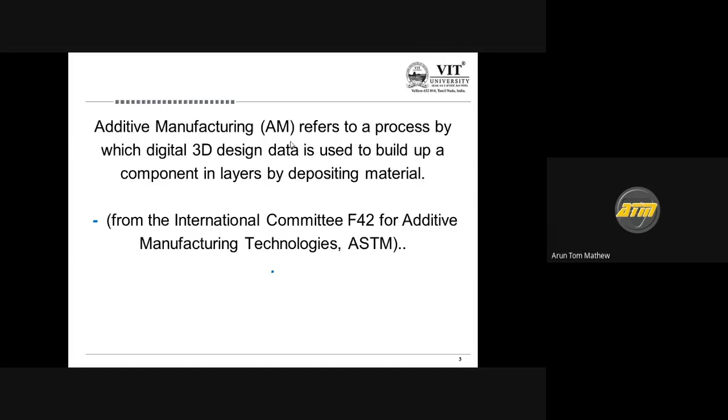But came in additive manufacturing, where without losing any material, or literally very little material we are going to lose, we ended up making products faster and with a better finish. So that brought in a very big change in the kind of technology product designers and people who are into new products are developing.

So first we need to understand what is basically a 3D printer. I'm sure all of you are aware of the normal printer, the 2D printer, where we used to print black and white A4 sheets and A3 sheets, both color and black and white. But nowadays we have the so-called 3D printers, which added the Z dimension to it. So we don't have to print anymore in 2D. We can actually get almost to-scale 3D printed objects where you can feel the products in your hand.

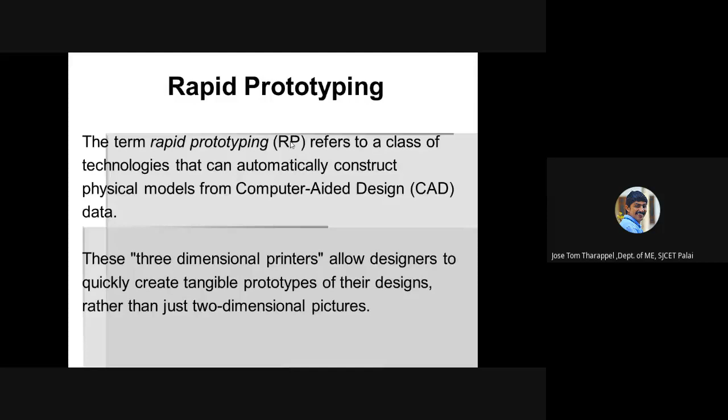Getting into more specifics, it's basically helping designers and more specifically prototype engineers to understand their design in a better way rather than just looking at a 2D picture. This has changed everything, because 3D printing is just an offshoot of something called rapid manufacturing or rapid prototyping. And when you say rapid, it's basically fast. I'm sure all of you are aware that nowadays you are able to print a product within an hour's time.

The cost of printing has come down so much that you are actually able to buy a 3D printer almost equivalent to the cost of a normal 2D printer. In fact, some of my students here have bought a printer and kept it in their rooms because they don't want to depend on the printer available in the lab, since it has become so cheap. Four or five students pool some money and they're able to buy a printer on their own.

All it requires is a software, a CAD software. You just have to plug and play, and then you are able to print at a very fast pace. So this has changed a lot of things over the years, and there's been a lot of advancement in it.

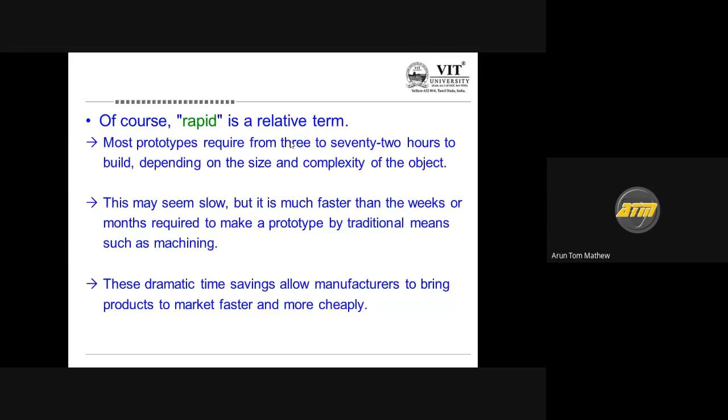Because the moment you have a 3D model, it becomes very good for actually communicating your ideas. It becomes an excellent visual aid. At the same time, it can also be used for testing. You don't actually require metal prototypes anymore. You can use 3D printed prototypes to test and study your product in a better manner. It also helps you create tooling in a faster manner, without spending a lot of time depending on a third party to make your tools. And with the advancement of this technology, you're actually able to make production grade quality material, which has been accepted by the industry. That's the reason why there's so much focus in this particular area.

So just a quick recap of what 3D printing technique is all about. I'm sure most of you are aware, but just to get a feel of the whole concept, we'll run through this.

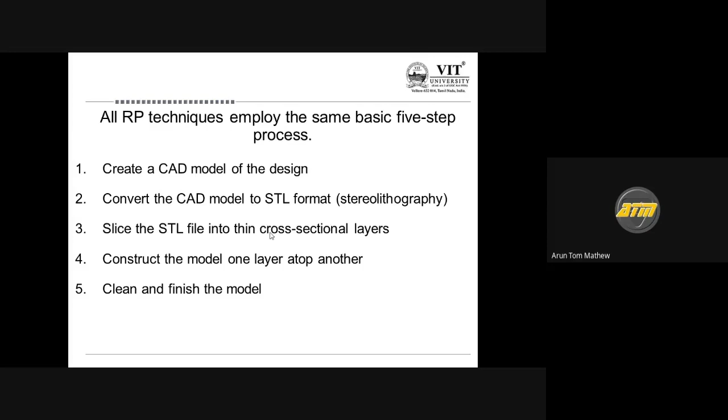First and foremost, you require a CAD model. From the CAD model, we develop something called the STL format, which is basically the input for the 3D printer. In the software itself, the STL format is basically the whole product or model sliced into a number of layers depending on the accuracy you want. Then the whole thing is sent to the 3D printer. The 3D printer understands the stereolithographic format, and based on the lowest slice layer, it starts printing one layer over the other, and finally, over a period of time, finishes the complete product. Then all you have to do is take it up, clean it up, and start using it right away.

So that's what happens nowadays with a lot of advancement. You can have numerous softwares which are compatible with 3D printing. All you require is a decent 3D model software, CAD model software, which can give you a solid model with a better finish. Once you're able to do it, you can directly get into a 3D printer.

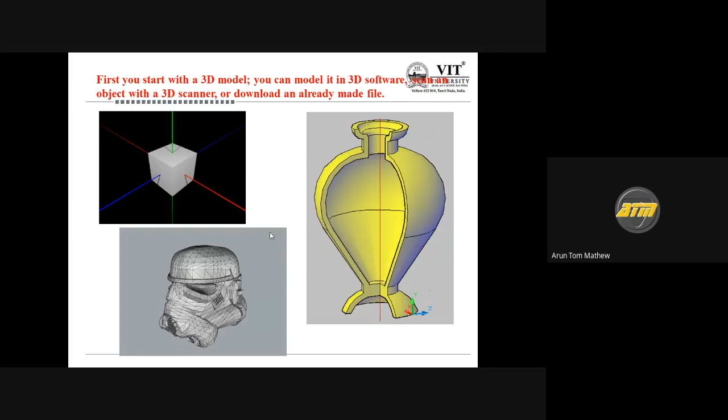Also, with the development taking place, we don't have to create a solid model anymore. We can get a model from a third-party scanner, now called a 3D scanner, which has also become very cheap. You can use a 3D scanner to simply scan the product of your liking, get all the scanned data, and directly take it into your 3D printer. It becomes much easier. So even a person who doesn't know CAD isn't worried now, because the system takes care of converting a physical model into a CAD model based on your 3D scanner. You can directly import this scanned model into the 3D printer, and then directly print.

So this has been a hit. You don't have to be technically strong to understand 3D printing. Once you have the requisite software and hardware, you can simply go ahead and start printing. So likewise, it all depends.

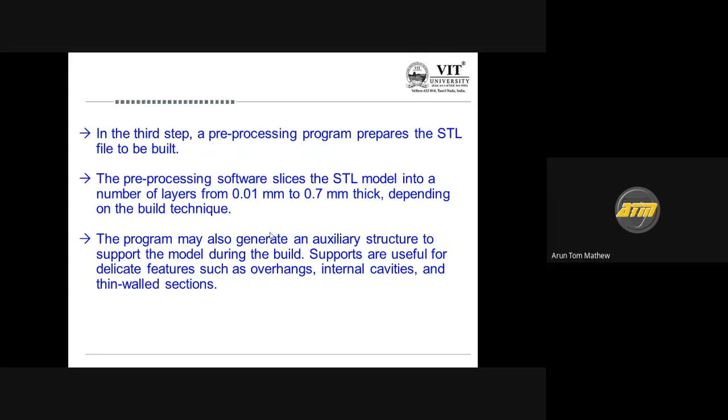Once you understand the nitty-gritties of the technology, you will understand that given the complexity, you have to do some pre-processing to understand how good your layer thickness should be, so that you get a better finish compared to the standard, default thicknesses adopted by some software. So once you understand the nitty-gritties of the model you want to print, whether it has internal cavities or thin wall sections, depending on the complexity of your component, you can start using the right parameters.

And you will get a better finished product at the end of the day using the 3D printing machine. So with this, depending on what product it is, doesn't matter how complex or what kind of material you want to use, you are able to print, which wasn't practically possible even before this technology came into existence.

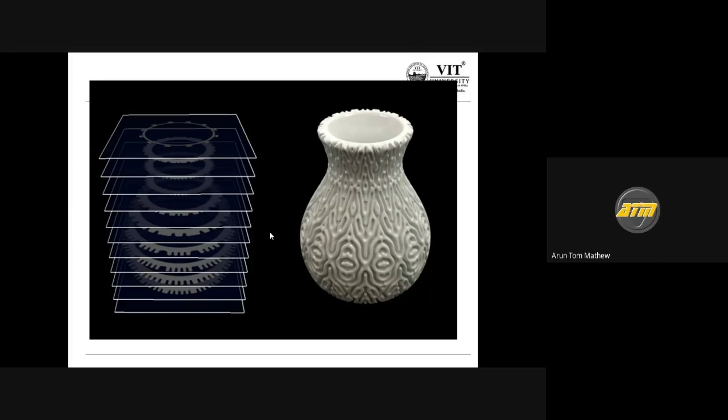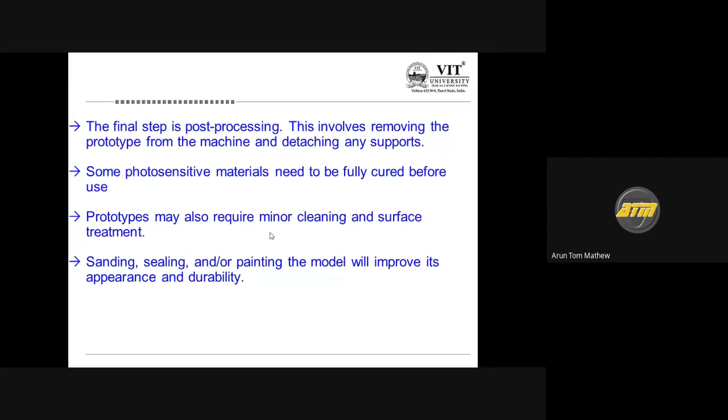So you need to understand the kind of material that has been used. Earlier, there were initial materials such as nylon and PLA and all these things. But nowadays we have a lot of advancement, such that people have even started printing metal using 3D printers.

Of course, this is a little bit expensive, but over a period of time, I'm sure the cost of metal 3D printing will come down and this will become commercialized. You're probably aware that Wipro and IISc Bangalore just last year commercialized one metal 3D printer in their campus, where industry is also collaborating, so that you are able to make production grade products directly printed out of a 3D printer.

So no more do you have to depend on the conventional style of machining or material removal. Irrespective of the complex models you have, like a turbine blade, you can directly print using a metal 3D printer, and you're able to achieve it in no time. The beauty over here is...

you can actually commercialize, I mean, whatever may be the complexity, you can custom print the product you want. There's no need for the customer to order 10,000 samples or 1,000 samples before I'll make the product, because normally I'd need to invest in tooling. In this case, I don't require anything. Whatever the customization, I just require a 3D model, and then I will go ahead and print the model and get it to you.

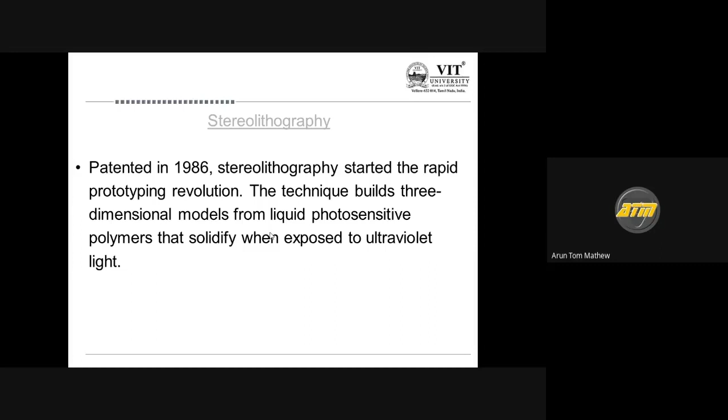Depending on the complexity, the time required will vary. So the whole thing started off when the process of stereolithography was patented in 1986. Mind you, I would like to emphasize the term patented. Only when you patent or publish such kind of work will the general public understand there's some work happening here, and people will start appreciating what has been happening.

So what happened was, some material was given, and you were able to print like what you're able to see on your screen, and people were in awe of it, wondering how we are able to create such complex shapes in less amount of time.

So where did it all come from? It's not something very new. This was there almost in the 1800s. If you look at the Greeks, that was there too. They used something like this to build monuments, which are still existing in the world, and they actually did this by building blocks over each other. So the same concept was actually used.

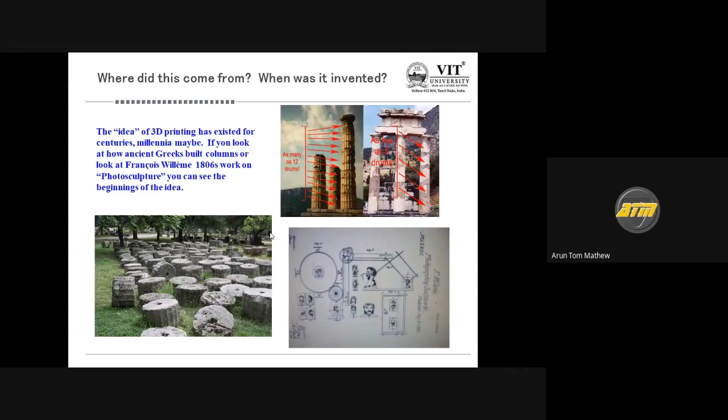What we see now in the present 3D printer is we are actually doing it layer by layer, just that the thickness of the layer is different. So the hero of this whole story is Charles Hull of 3D Systems, who gets the credit for first developing the 3D printer in 1984. And he was the one who coined the whole technology called stereolithography.

And the word is so famous that the STL format is, in other words, called the stereolithographic format. But I'm sure you're aware that STL actually stands for Standard Tessellation Language. It's like how a photocopier is called Xerox - I'm going to take a Xerox, but in actuality, you're just doing a photocopy.

The machine, the product from Xerox company, made it so famous that we started using it in our day-to-day life, and that's what happened over here. Very similar, it's a revolution over here, that the term, the file which was supposed to be called Standard Tessellation Language File, STL, invariably ended up being called a stereolithographic file.

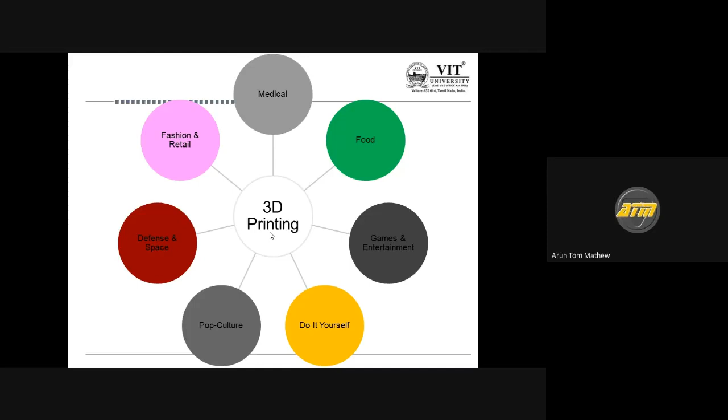Likewise, this technology has also found a lot of applications in the defense sector and even space, where nowadays existing generation aircrafts no longer have spare parts. If you need to replace a spare part which is no longer available, you can actually use this technology to print that custom-made product part and then fix it back into your aircraft.

Even nowadays, people are talking about 3D printing directly in space. In fact, they are even looking at projects to print 3D printed material on Mars. With the latest travel to Mars, people are trying to see whether you can actually print directly on Mars and make houses there, because it is definitely extremely difficult.

If you want to make a house there for scientists to stay, it is practically impossible to build a complete house on Earth and then transport it to Mars and assemble it there. Rather, it would be more cheap and economical if you could actually directly print on the planet Mars. We never know how the future is going to turn, but it will be very interesting to see how this technology is going to help.

Likewise, look at more applications. This is definitely used by a lot of industrial designers, who are known to make excellent and beautiful products. To understand the products better, they like to have a physical model, and instead of doing a clay model or a thermocol model or a model with some sort of POP material, they can actually directly 3D print the model. Of course, it can be slightly expensive in the initial stages, but you will get an actual feel.

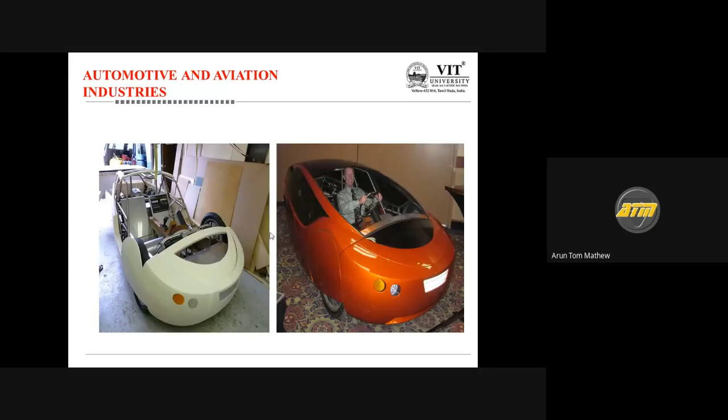You can see one of the cars over here, which is totally 3D printed - the outer shell is totally 3D printed, and you're able to actually commercialize this product which is 3D printed. In fact, this application is also there in architecture.

Even civil engineers use this extensively. Nowadays, I'm sure you've heard of houses getting 3D printed using concrete as the raw material, and they're able to build a full-fledged house by simply printing concrete layer by layer, which forms the wall of the house. This has also been used in architecture, and they're able to handle complexities, especially in a lot of monuments coming up in different places.

No matter how complex it is, you are able to print these models. And I'm sure you would have seen the different kinds of chocolates that are available in the market.

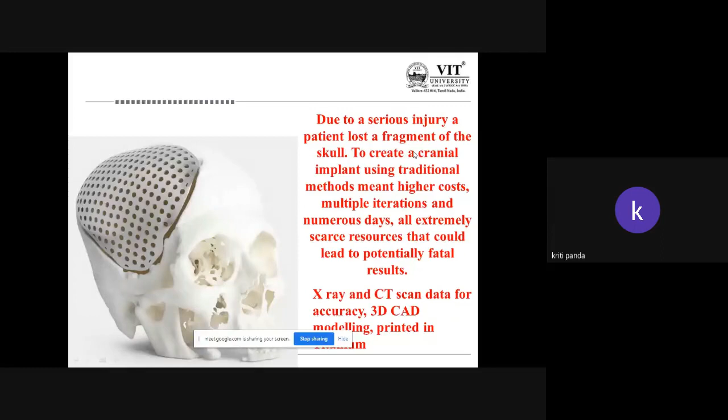Okay, I'm sorry, I didn't know that I left the meeting because once you put a full screen over here, I can only look at a plain screen. Praveen, can you hear me? Yes, sir. Okay, thank you. I don't know how much I've missed.

So they made up this particular plate, which is custom built for this particular patient. They did a small surgery and inserted this plate onto the skull and then grafted back the skin. Over time, it looked normal, and a third person looking at this lady will never know there's a metal made of titanium, printed in titanium, fixed onto her head. Anyone looking at her for the first time will never know she had an accident. So that is the kind of advancement 3D printing has.

You are able to print using a material called titanium itself, and this is possible when you play around with the CT scan data from the CT machine, and then using the CT scan data, you are able to make a CAD model of the requisite portion, and then custom print this to fit your skull.

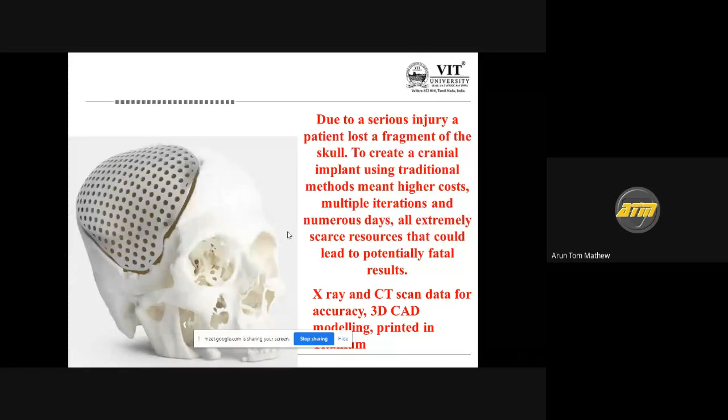And likewise, even in dentistry, where you need to replace the complete jaw, this technology can be used extensively, and it helps people go back to their routine life without any stigma. Like I said earlier, this is another patient, again a real-time case study.

Hello sir, the audio is not available. Yeah, I think I'm back. I'm sorry, I think there are some connection issues. Yeah, am I better? Can you hear me? Yes sir. Can you see my screen? Yes, it is audible, thank you. You can continue, thank you.

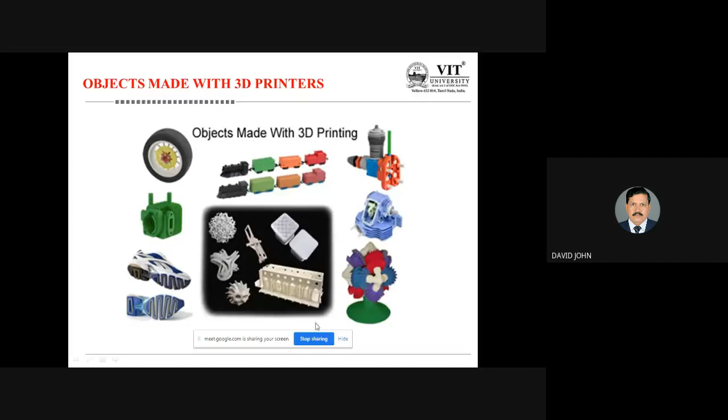So what is happening now is we have seen this application, and there's a lot of toys getting printed now, and it's definitely helpful for kids who can have custom toys. And another area where this is getting extensively used is replacement.

Especially when a lot of products are going offline, off shelf, and you don't have a replacement, you can actually do a custom build replacement for your kind of products. Likewise, whatever may be the shape of the product, you are able to print whatever the complexity, whatever color you want, as long as you're able to get the material and the color grade you want, you are able to print the particular product.

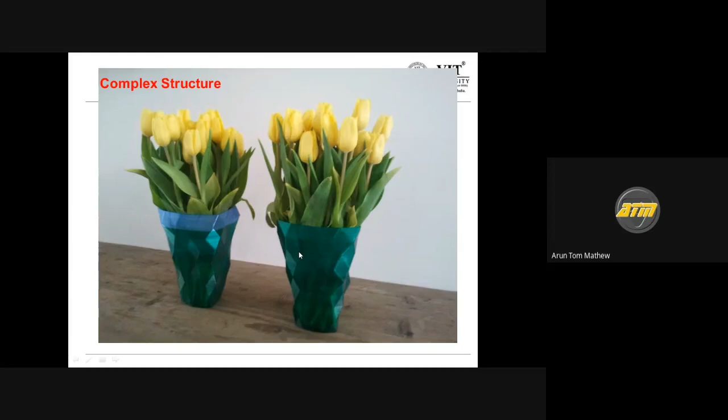You'll also be surprised to know that the Airbus 350 has seen a lot of advancement, using a lot of composite materials, and even these composite materials have been 3D printed. In fact, the latest version of Airbus, and even Boeing, has a lot of 3D printed products in their aircraft. Next time you fly, try to look out whether you can identify a 3D printed product in your cabin, because it will be very difficult to distinguish the two structures.

Let's go ahead. We have some animated characters also which can be 3D printed. And we have another important application where we have prosthetics.

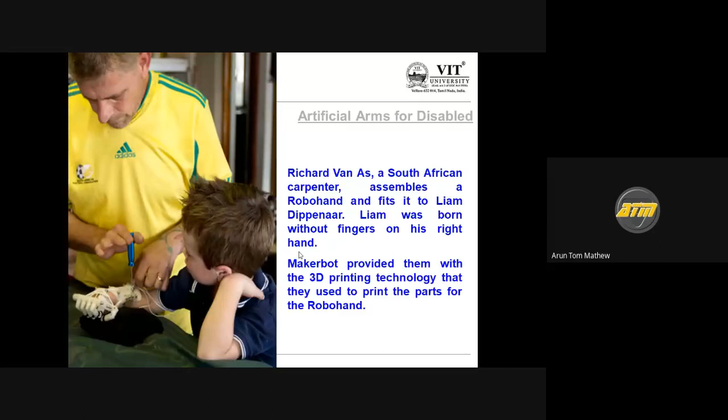Where people are able to replace amputated hands and legs with this particular technology. I just want to play a small video. I hope it will be beneficial.

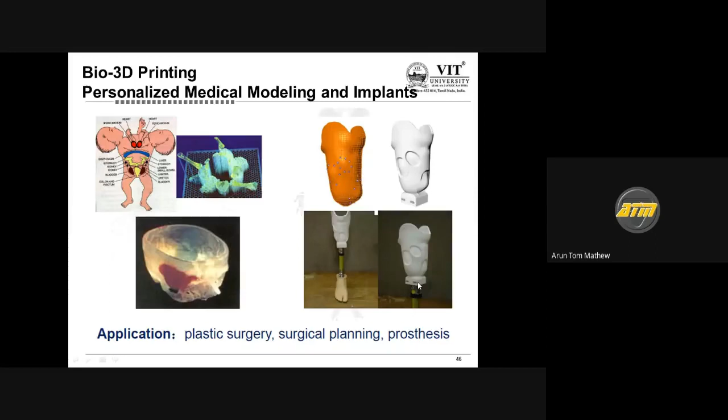So, yeah, so like I said...

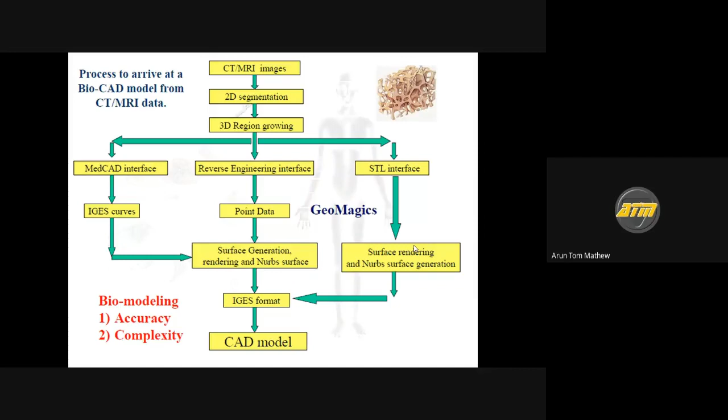And then what happens over here is we have an algorithm where we require the CT or MRI images, and we do a 2D, 3D segmentation, and then generate point cloud data out of it. Using all these softwares, we have to do some biomodeling which requires a lot of accuracy. There is more complexity over here because, since it's a human body, you have to be very careful, it's extremely complex, and you require a high level of accuracy to achieve something like this. You can see there are experiments where you're able to actually print a total tissue, in fact a liver or a heart is getting printed over here. But of course this is all very much in the nascent stages, it will take a lot of time to get commercialized into the market.

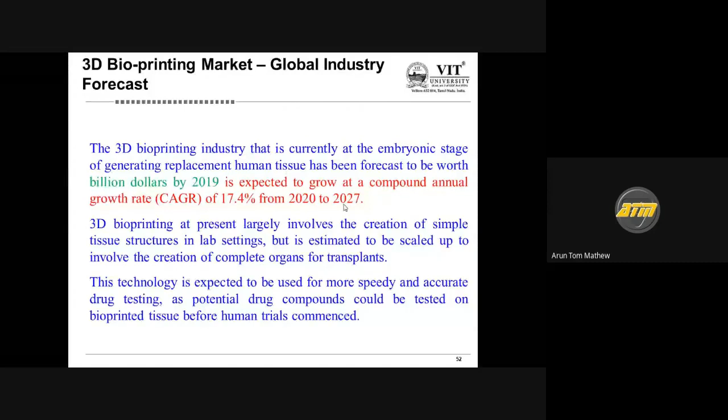Especially in this current pandemic situation, COVID-19, there is more demand over here, because you find issues where lungs are getting damaged, and people are looking at exponential growth in this area. I'm sure by this time you're aware that people in different education institutions and industries were overnight printing masks and distributing to police personnel and medical people, so that they have a shield in front of their face, which is 3D printed. They could do this at a very fast pace because of the technology available, and because the printer is actually very cheap.

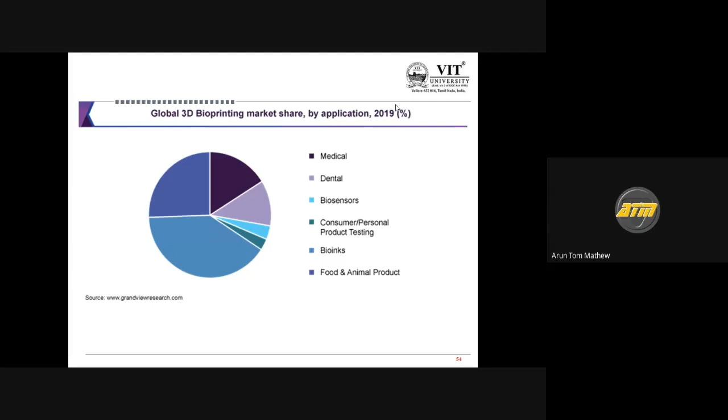So you can also see the applications over here, a lot of applications in terms of medical, dental, people are also able to develop some kind of biosensors using this technology. People are developing something called bioinks, which I will come to shortly. Also people are exploring whether we can print food, and even meat, using this technology. If you look at the market value, it's a huge number, even people can't imagine how this technology is going to generate this kind of revenue over the years.

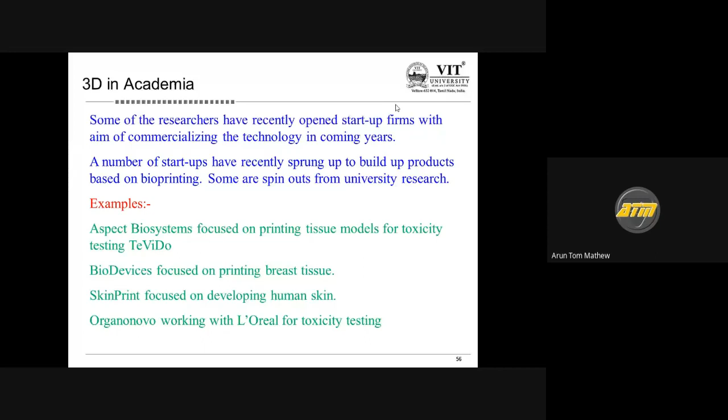Yes, so even in academia, a lot of universities are trying to do a lot of niche research, and they're incubating it in their own universities. I can give you examples where some companies are able to start commercializing their own research, and they're able to make a lot of products from it. If you look at the commercial market itself, a lot of work has been going into developing bio ink and bio paper, because these are the prime materials for you to print.

Without the materials, you definitely cannot print, so you have a lot of scope in making biocompatible materials themselves. To deal with such materials, you need requisite software, because all these materials are non-linear, so you have to do some kind of analysis, even design, to understand how they will react in real time. And definitely you have to have the requisite hardware. I'm sure a lot of industries are doing work to commercialize each of these sectors.

This has also created a revolution in the pharma industry. I've read that nowadays you can actually 3D print your own medicine, depending on the Industry 4.0 revolution where everything is monitored. You can monitor a patient, and let's say, for layman discussion, you have fever and need to consume 650 mg of paracetamol. If you go to the doctor, he'll say take 650 mg paracetamol for the next 5 days. But over time, within 3 days your temperature is actually going to dip. So why do you have to consume 650 mg paracetamol? Instead, if you have a sensor embedded that can monitor your level of infection in your body, and instead of a fixed 650 mg dose, you could 3D print the paracetamol so you just consume the required level.

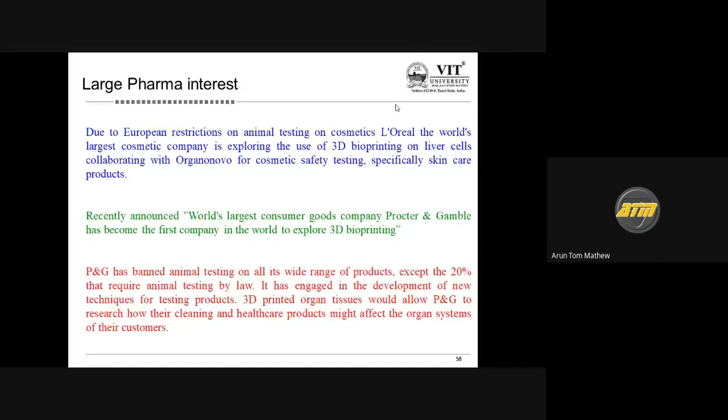So there's a lot of revenue being generated here, but with so much interest, you definitely have to look at the flip side. There are a lot of challenges, because the first challenge is that when you insert a foreign body into a biological structure, it will definitely tend to react. So you have to be very careful about what kind of transformation or transplant you're going to do, because this is something every doctor and every patient will experience, since the moment a third party enters your human body, your body will definitely react.

So you need to visualize this even before inserting it into the body, and understand the physical, chemical, and biological impact these products can have on the human body. Likewise, it calls for fabricating complex tissues so they can emulate what is there in your human body. These are the challenges, and this has been widely used in the industry, like what you can see on your screen.

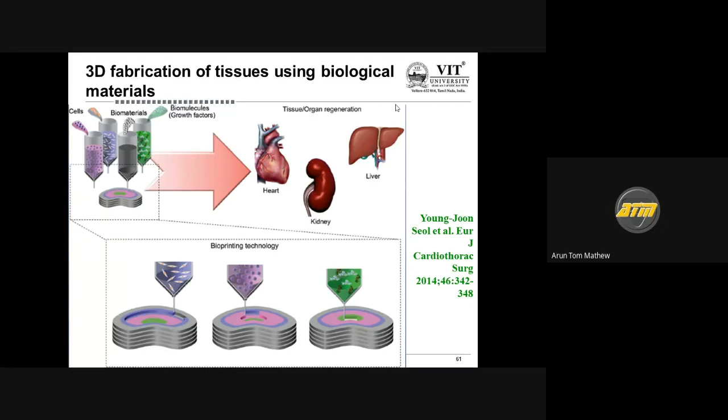A lot of advancement has been made. I'm quoting a paper from way back in 2014, where they are trying to 3D print tissues using biological material. Also from this 2014 paper, they were able to print a trachea, which is basically hollow, and they also succeeded in printing livers and tongue. Of course, I won't say this is directly available now, commercialized, but a lot of work has happened here.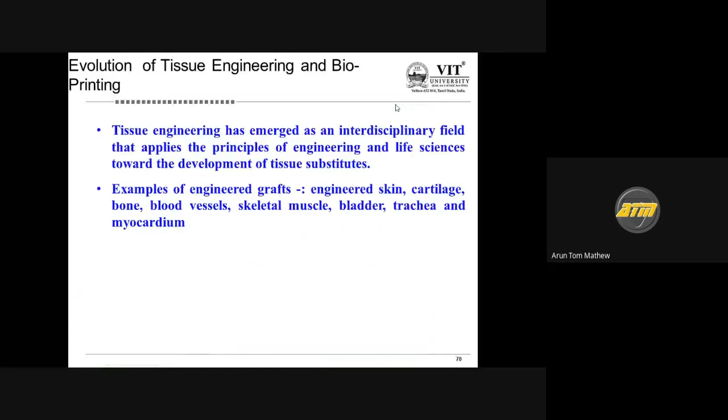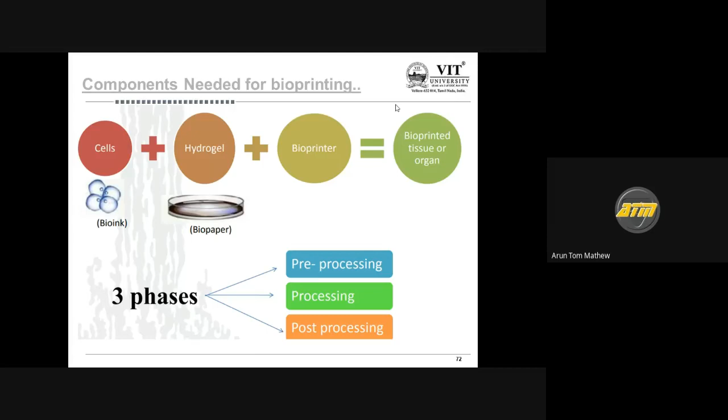I'm trying to skip some portions because there's a lot in there. What is required here is you need to understand the printing process, because you have to have some kind of material called bio-ink. What does this bio-ink consist of? It's basically your cells, and this cell you have to mix with something called hydrogel, and this slide will explain it better.

I'm sure you've heard of stem cells, and these stem cells have to be cultured so they grow in a laboratory environment. Once they are cultured, you have to collate them with a hydrogel, and this will form something called bio-ink. This is what you use to print your tissues in a controlled environment. So this becomes even more complex, and this is what has been used for bioprinting.

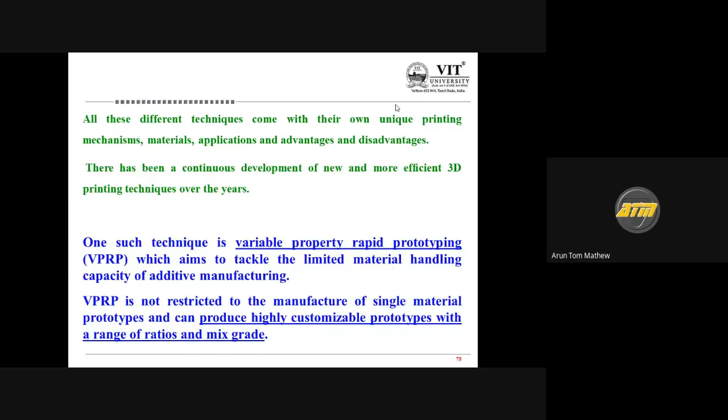So we also have to be aware that printing is not restricted to one kind of material. Especially when you have composites, we definitely have to look at customizing prototypes by mixing different kinds of materials, in different ratios, and even mixing different grades of materials. That's where we have the beauty of 3D printing advancing with the use of something called smart materials.

With this advancement, we are able to print materials which are smart enough, and that's where we have something called 4D printing. This is a beautiful technology that is evolving.

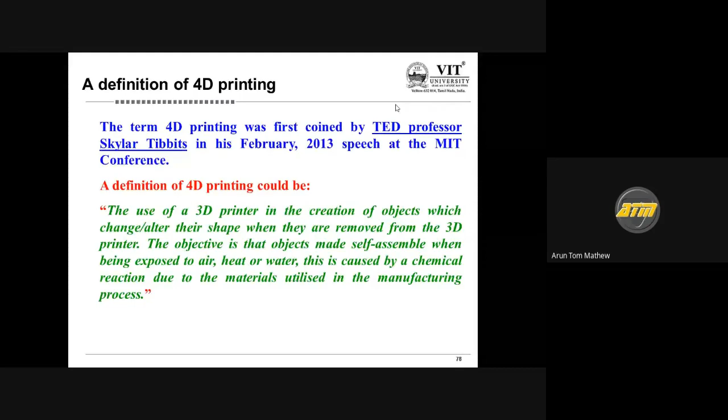A lot of work has been happening in this area. Interestingly, the term 4D printing was coined by an MIT professor, Skylar Tibbits, who defined it as the use of a 3D printer in the creation of objects which change or alter shape when removed from the printer. The objective is that these objects self-assemble when exposed to air, heat, or water. This is caused by a chemical reaction due to the materials utilized in the manufacturing process.

So this is what he has defined as the 4D printing process. What has happened is, instead of using your typical nylon or PLA or plastic, we tend to use material which can transform and be pre-programmed to react to a particular stimuli. In a regular 3D printer, you simply insert the material and it gives you a static structure.

Whereas in 4D printing, you use something called a smart material. It can be in the form of a resin or similar, and you print this material which can behave differently when a stimulus is applied to it. I will show you a video so that it helps you understand better.

I'll just play this, I hope it will help.

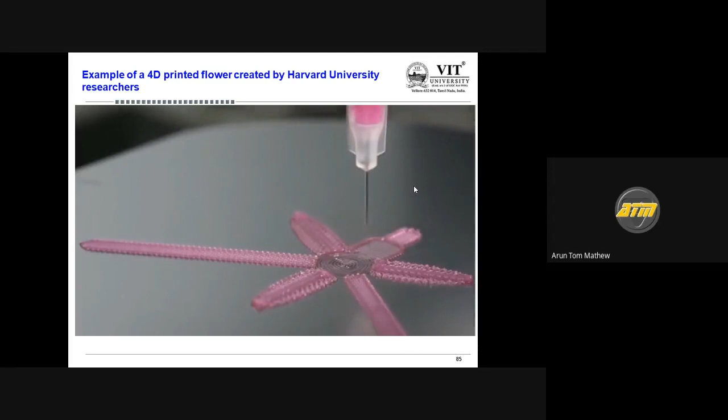You can see here, once that printed object is put into water, it starts behaving like a flower. That is the kind of advancement that has happened, and that's what makes it more interesting, because the whole thing gets activated the moment you put it into a different medium.

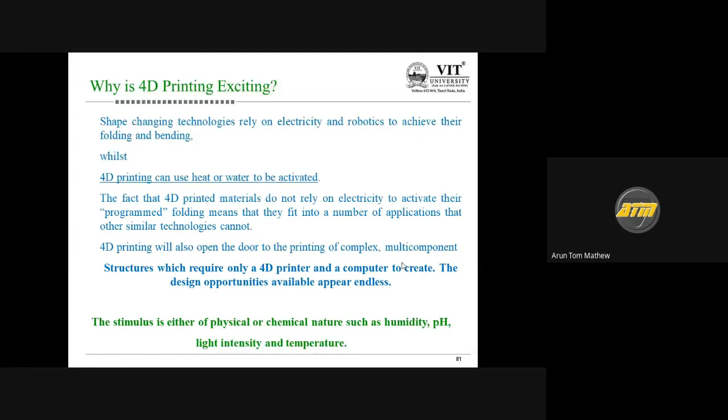When you say medium, you're basically looking at a stimulus, either physical or chemical. Either you put it in hot water, change the composition of air, apply some humidity, change the pH value, the light intensity, or the temperature. Any of these, and you'll find the shape getting changed, which can lead to a lot of applications.

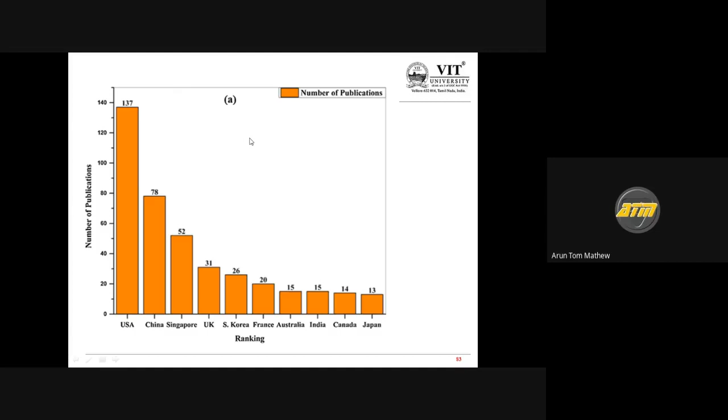So the interesting part is the kind of applications coming out. We in India are far behind — only now have very few people started working in this area. But if you look at the States, they've done a lot of work, and over the years the number of publications has been drastically increasing.

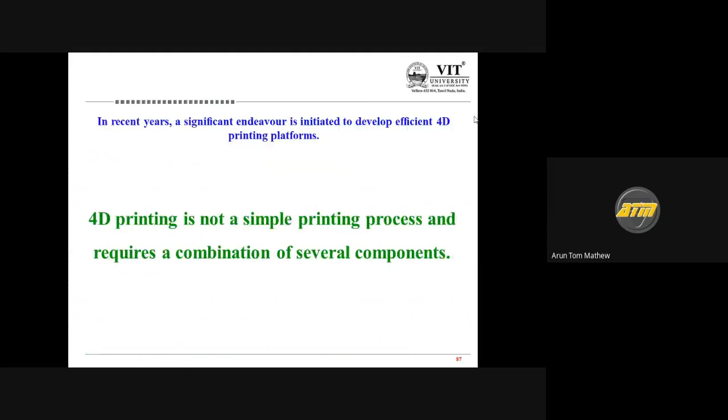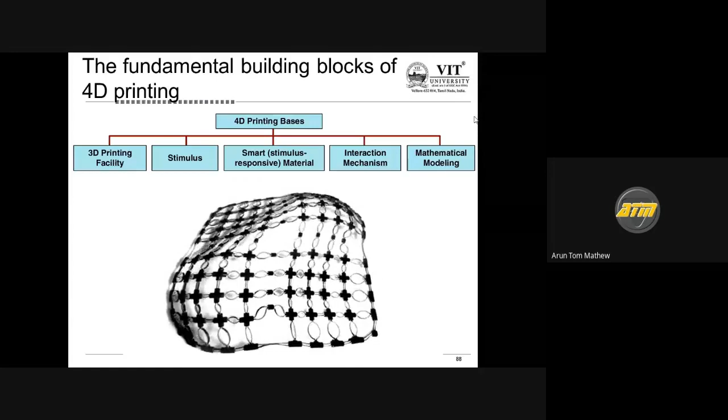To get into the fundamentals, the building blocks of 4D printing are: you definitely require a 3D printing facility, and you need the kind of stimulus you want to use to stimulate your 3D printed component. Then the material you're going to use, which I already mentioned, has to be a smart material, and you need to understand what interaction happens. You also have to look at the mathematical modeling, because you need to understand the physics of how these shapes are happening.

If you look at the 4D printing software, a lot of work has to happen in understanding the modeling. We also have to look at the simulation aspect. There's also a lot of work happening in print management, because you need to print accurately. At the same time, you have to know what hardware and software you're going to use, what slicing mechanism you're going to use, and you also have to look at the feedback mechanism to monitor the whole technology.

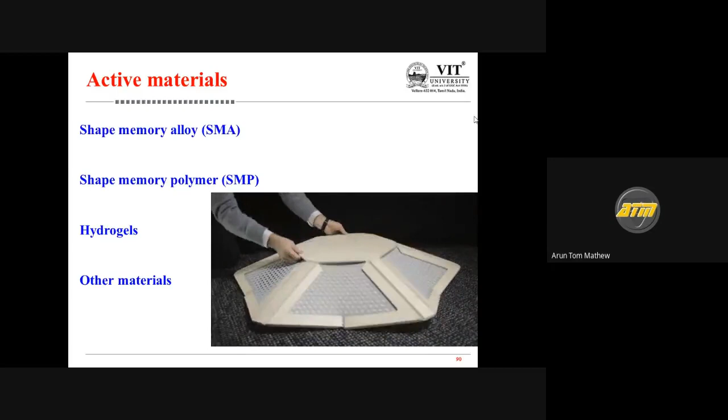You should also have an idea of the different kinds of materials used, especially in 4D printing. Primarily we have shape memory alloys and shape memory polymers. We also have hydrogels, which you've seen used in bio 3D printing. And then we also have a lot of composite materials used in this field.

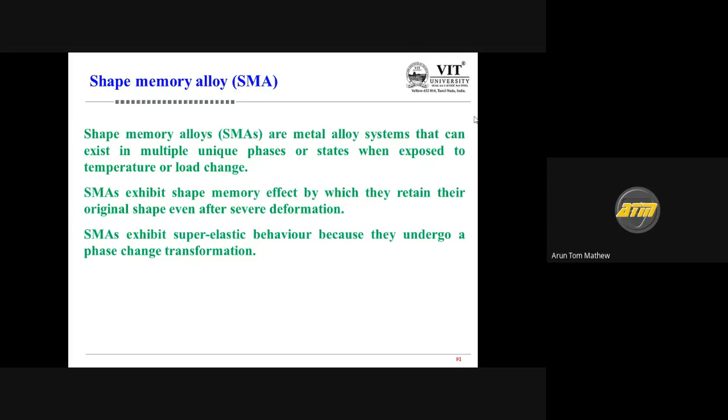A shape memory alloy tends to change its shape when exposed to temperature or some kind of load. These alloys exhibit something called superelastic behavior because they undergo a phase change transformation when exposed to a stimulus. I won't get into a lot of details here, but let's look at one application where this alloy is actuated by magnetic fields and used as an actuator. I will play a video here.

You can see this particular shape memory alloy, which has been used as an actuator.

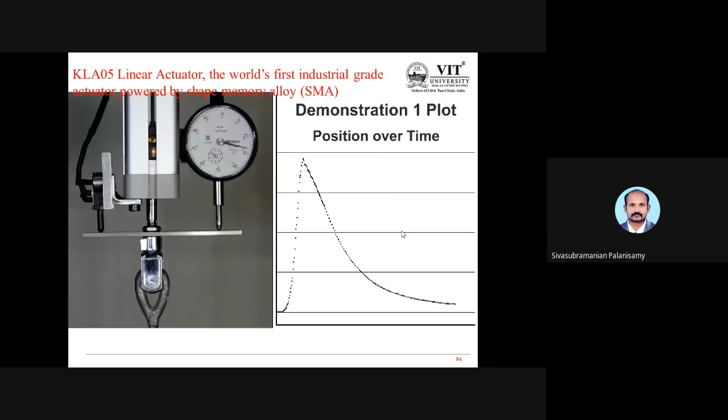Sir, it's not audible. Oh, one minute. What's happening? It's fine, yeah. Is it audible now? Yes, sir. But are you just showing the video, or explaining along with the videos? No, I'm not explaining - the video itself has audio, so I'm not sure whether you're able to hear that. Then it's okay, sir. We thought we were not audible, that's why. Okay, carry on, sir. Thank you.

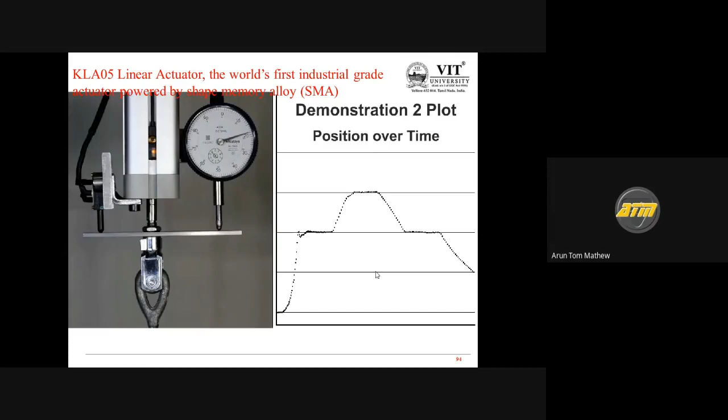You can see this is a linear actuator using industry grade shape memory alloy for actuation. This has a lot of applications in industry, specifically for the actuation part.

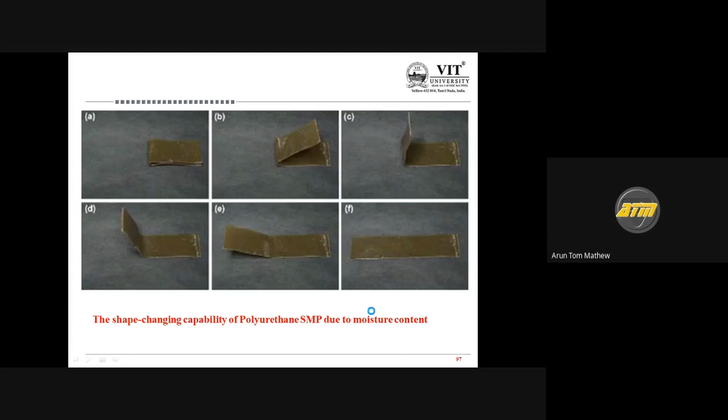Likewise, I don't know whether you've heard of this particular alloy, nitinol, which has become a major player in the biomedical field. You can see the application of the polymer here. Again, I would like to play a video so it's much easier to understand.

You can see how the filament has changed shape when exposed to hot water, and you see how this can be used.

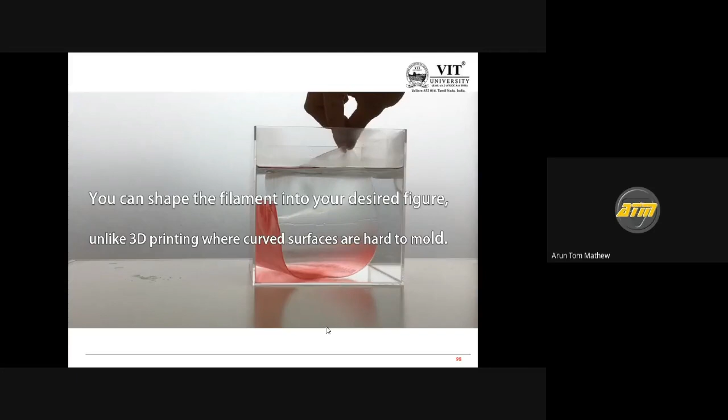Okay, I think it's not buffering well. One more thing I will show you and then go to the next one.

What you can see here is basically a self-folding structure, something like an origami box or a pyramid, as you saw in the video - a material that, once exposed to hot water or some other medium, will actually fold or unfold. This can definitely have plenty of applications. So that's what 4D printing is all about.

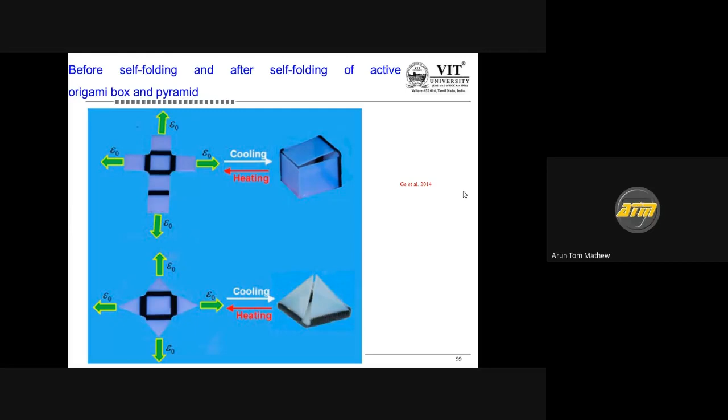What you need to understand here is that both of these examples use shape memory materials. Shape memory polymers are much lighter and found to be more flexible because of their polymeric nature. That's why they also exhibit a higher degree of biocompatibility compared to shape memory alloys. In addition, the recovery rate in SMP consumes less energy during the memory programming.

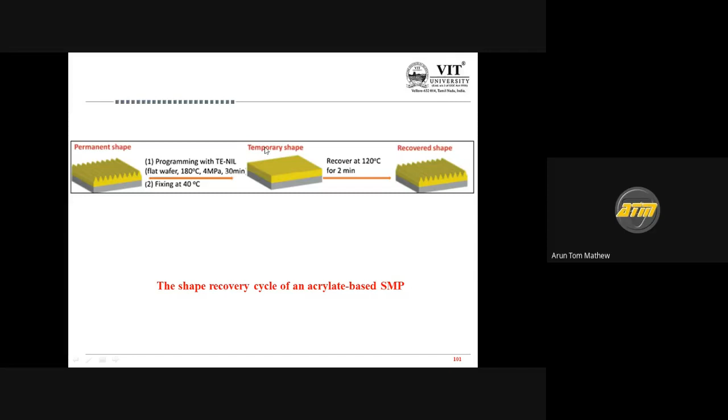Another example I can show you is the acrylate-based SMP, where you can see that if you look at the wafer exposed to a certain temperature, it changes shape. Once you remove the temperature, within literally 2 minutes, it gets back to its original shape. You can see here the permanent shape and the recovered shape are almost the same, and because of the phase change, they look very different in between.

So this is the advantage of doing 4D printing. You can actually modify your existing 3D printer to act like a 4D printer just by adding some attachments, like modifying it with an air circulation system to help cool down the SMP below the glass transition temperature.

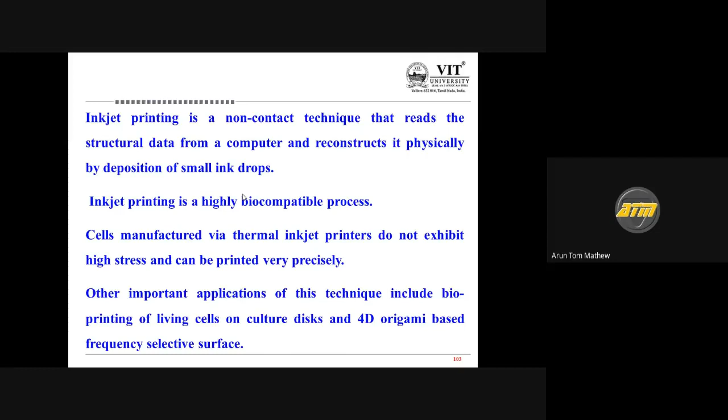Likewise, you can use inkjet-based non-contact techniques to print these kinds of materials, because inkjet printing is highly biocompatible, and you can do better things using inkjet printing or even stereolithography. Stereolithography or inkjet-based printing is preferred over FDM because of the nature of the material used, since most of the time we end up using resins for 4D printing.

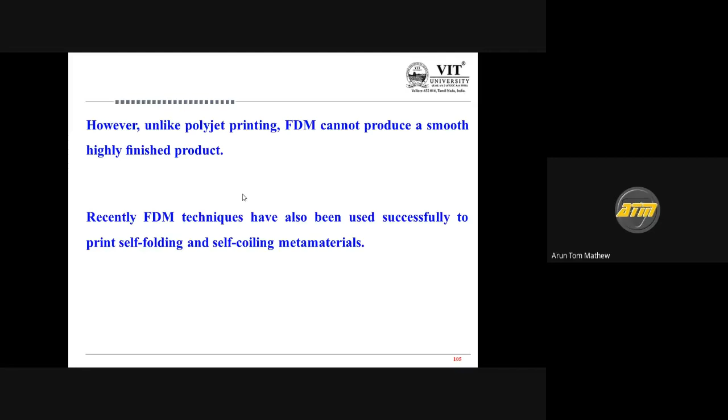And not only that, FDM cannot produce very smooth or highly finished products when you're using 4D printing. You require more of such products, which you can see on your screen, because you need more flexibility when it comes to 4D printing.

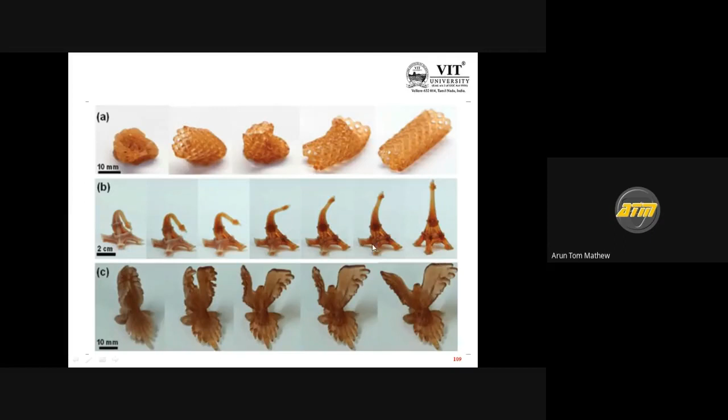Let me show you a few more examples, where you can see a deformed shape of the Eiffel Tower regain its original shape when exposed to a medium. Likewise, you can see different examples. I'll play a video, and I hope it buffers correctly so you get a feel of the process.

So you can see a miniature model of the Eiffel Tower, which is deformed. But once inserted in this particular medium, you see how it recovers its shape.

It's buffering. I don't know why the video is not buffering properly. Let's play it once again. Okay, now I think it's better visible. You can see how it is changing shape, regaining its original shape from a deformed shape.

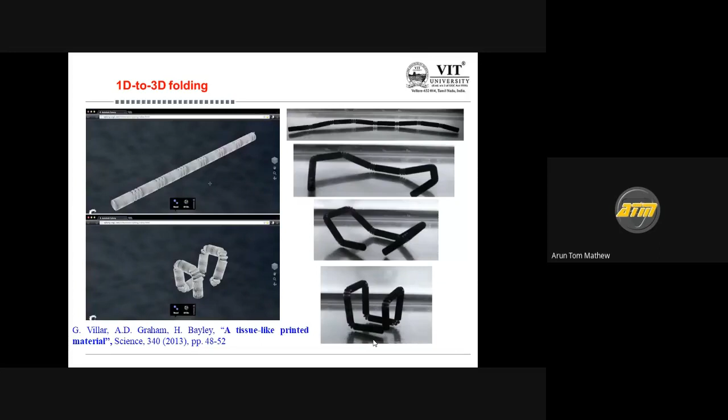You can see here where we can actually print foldable material, and then they can behave in a manner you want them to behave. That's the way you have to program the whole thing.

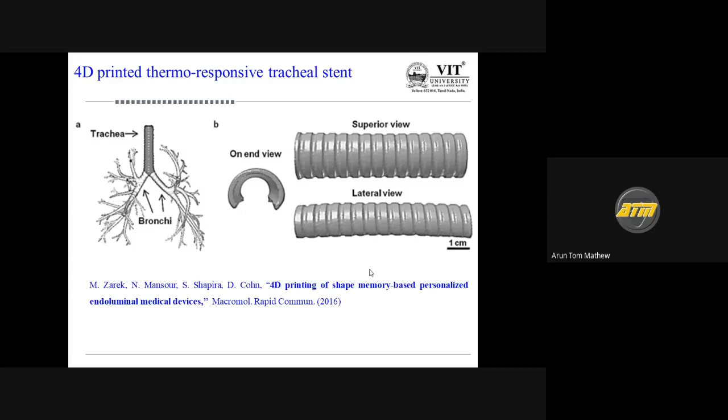Likewise, we also have a stent, which you can see here, which is again 4D printed and personalized to the particular patient. So there's a lot of advancement in 4D printing.

I don't know if I'm running short of time, but there are a lot of advancements taking place in the software itself. We also need more understanding of multifunctional smart materials, because as of now these materials are slightly more expensive. But if we can procure them, we can build and print 4D printed products of our choice, and we also need high resolution printers for this, though nowadays we're able to afford such printers in the market.

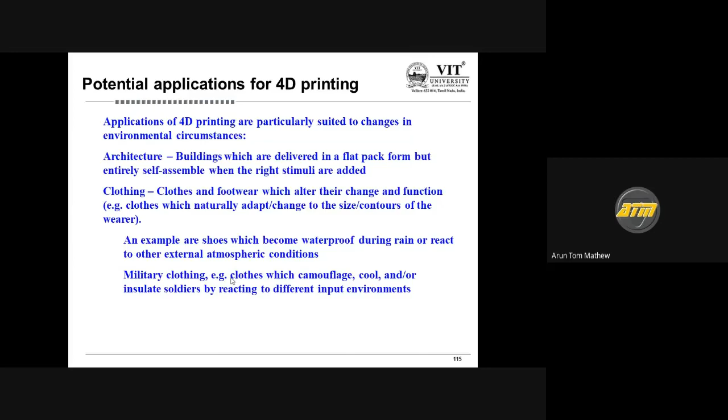So there's a lot of applications in 4D printing. You can see applications in clothing, in food, in health. I've even been reading about transport, where you have potholes which can heal on their own.